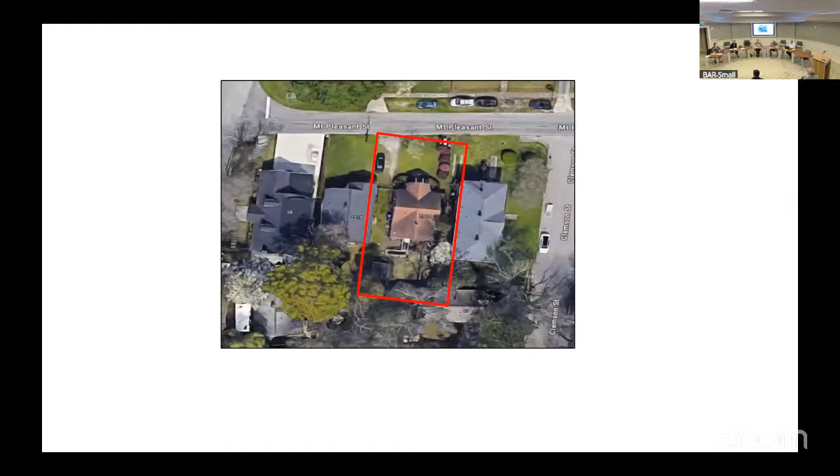Our first project is item B9, 2315 Mount Pleasant Street, and Frankie will give us an introduction to the project. It's located in Wagener Terrace, which is Council District 6. It is a category 4, circa 1940, in the historic materials demolition purview. They're requesting approval for partial demolition of exterior elements which are visible from the public right of way. This is the property's location on Mount Pleasant Street, and I'm going to turn it over to the applicant.

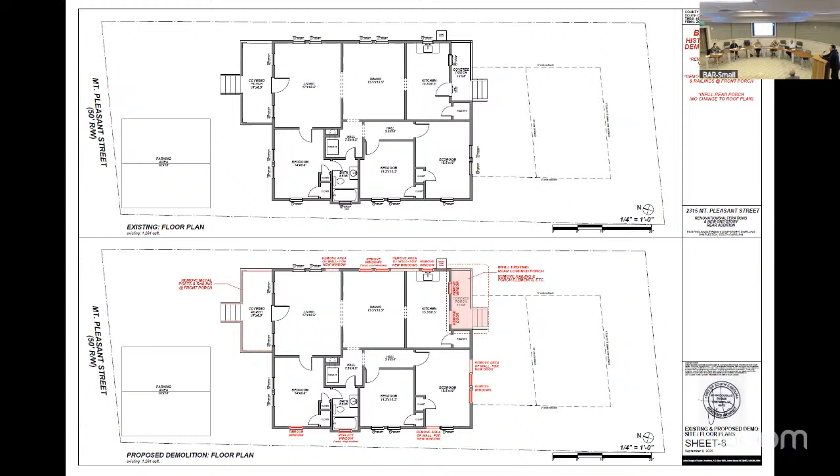Keep going here. If you look at the bottom picture, the plan for the back here is to infill the existing back porch, and then from there we will be doing an addition off the side. Here are the elevations of how it would look, existing, and then new elevations here.

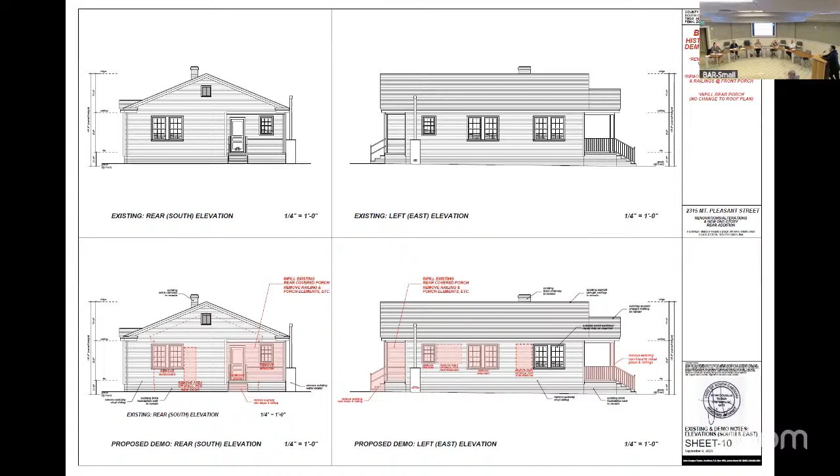That's showing the demo elevations because the board can't look at the proposed; I spoke to your architect already. So the red is showing the areas that you're demoing because that's all the board has purview of. Got it, it's all good. And that is it. Does anyone have any questions? No, sir.

Do any board members have questions for the applicant? No.

Do we have anybody speaking from the public?

Leonard, Preservation Society of Charleston. The PSC appreciated the applicant's time on site this morning. While we are not opposed to the removal of non-original vinyl windows, the existing historic wood windows should be repaired in kind. We encourage minimizing the proposed demolition and fenestration changes to the greatest extent possible. Additionally, iron columns are a character-defining feature of the Wagener Terrace neighborhood area character appraisal and are specifically called out there, so we encourage the board to evaluate these features. Thank you.

Any other comments? Frankie, please give us staff comments and recommendations.

So staff had some observations. The request is a removal of front porch columns and railing, rear steps, some side fenestration, adding additional openings in the side wall to match the proportion of existing window openings, and a portion of rear wall. Windows are character-defining features and should be retained. Staff is not opposed to the openings in the wall as they are matching existing window proportions, and the rear of the structure is minimally visible, only from Clemson Street.

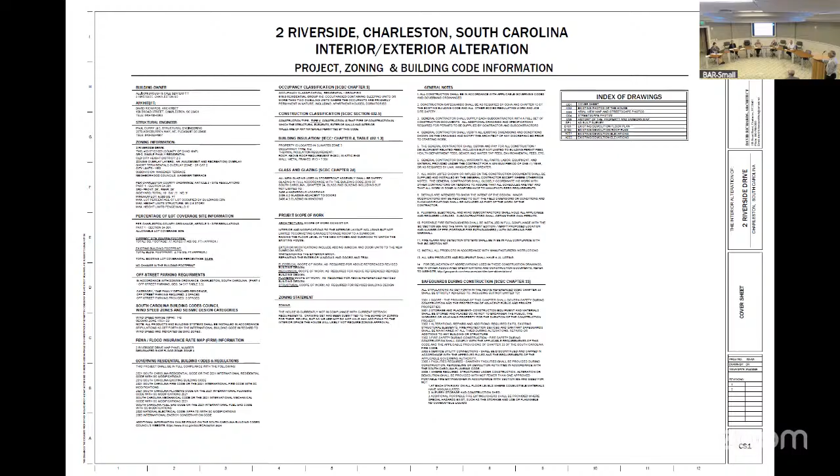This should be pretty straightforward. This is the property, this is the front elevation. There's no work being done on this elevation, which faces Sans Souci Street. This is Riverside, and there's some slight modifications on the back, but I don't think they're visible from the public right of way—minimally visible at most.

So we're really talking about 3 or 4 different things here. First, reworking this porch, making it a little more expansive so they can have a bench out here—right now it's just a stair. To my eye, and some of the board members agreed this morning, this is a non-original addition to the property. You can tell by the way the eaves don't align, and the original eave runs right behind there.

We're also changing it to, intend to change it to a hip roof rather than this gable. But I know we're not supposed to talk too much about the proposal for the new concept.

Removal of this front door—we couldn't assess whether that was original to the structure or added later. We know there were some changes done in 2018, which likely included this porch addition, but we just don't know about this front door. This is a non-original aluminum door. The intention is to remove that and brick in this space.

The concept right now is that the kitchen's in the back of the space. It's very difficult, it doesn't work. There's a laundry closet, so we're trying to bring the kitchen into this space and create a little sunroom here that opens into a very nice backyard. But right now, for them to get to their backyard, they have to come out the front door and around, or out the back of the property. So it's really an inconvenience and doesn't allow the owner to fully utilize the property.

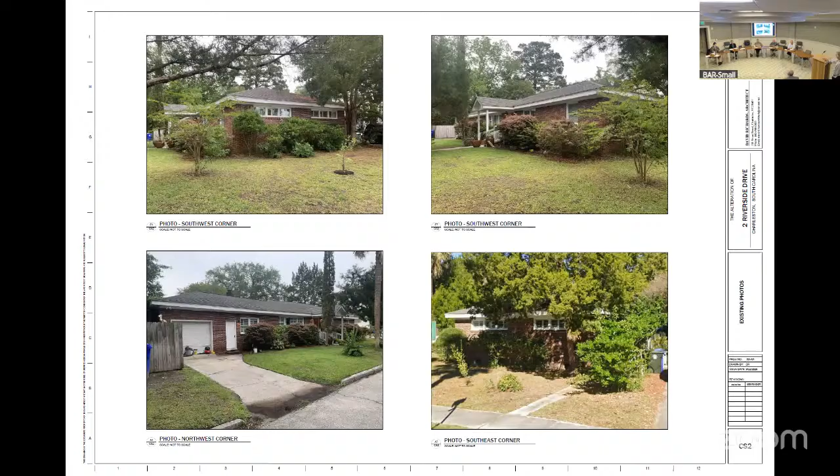Thank you. Do any board members have questions for the applicant? No. Is anybody speaking from the public? Frankie, would you give us staff comments and recommendations?

Staff had some observations that this is requesting removal of an entry porch, garage door, and portions of the roof. The front entry portico is not original to the structure, as we talked about this morning. The garage appears to staff to be a later addition, but its age is currently unknown. Staff is not opposed to alterations at the garage addition, as we believe this to be a later portion of the structure, though we're unsure how the proposed demolition will interact with the eaves and soffit. Staff recommendation is approval for demolition of the garage addition portion of the structure and the front portico.

Thank you, Frankie. Would the applicant like to address anything? Yeah, just to quickly address the comments about the eave and soffit—the eaves and the new construction for the new porch will tie in properly with the soffit, so it'll look as if it's original, but cohesive with the original design. That's the only modification, other than in the back, which again will maintain the proper eave and soffit detailing. We just weren't sure based on how it was indicated on the drawing, so we wanted to clarify. We can close that in the details. Yes, I'll agree with that.

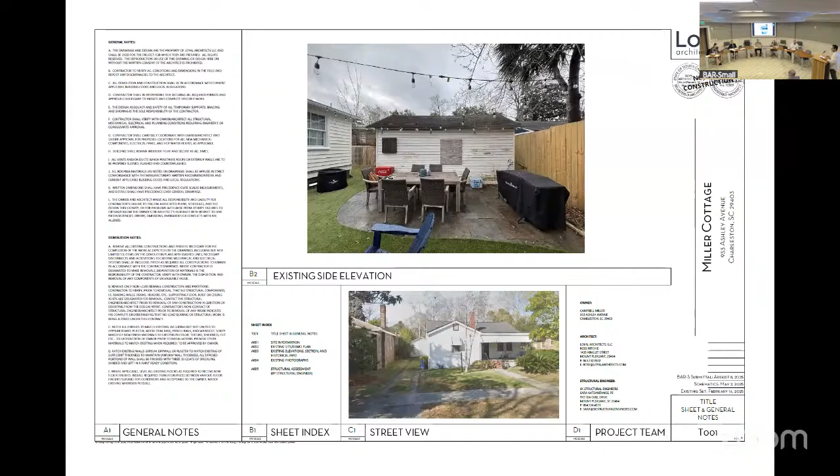Hello, I'm Ross Ritchie with Loyal Architects. Thank you for your time this morning at that wet, rainy site visit. We are requesting demolition of this shed structure, originally a garage structure that had been modified into a shed structure, with framing added over time. As you all saw, there's a lot of deterioration on the exterior and inside, including a large hole in the roof.

There's constant deterioration, and it's located below flood. As seen, it has a lot of deterioration on that bottom level of the structure and the siding. To do anything with it would take lifting it, and there's really nothing to lift at that point. The structural engineer stated it's not safe nor salvageable. We think there are some pieces we could probably glean from the demolition, but it's in rough shape. There's a floor in there, concrete and some gravel, and a CMU block curb, and framing had been added to that, and that's all heavily deteriorated.

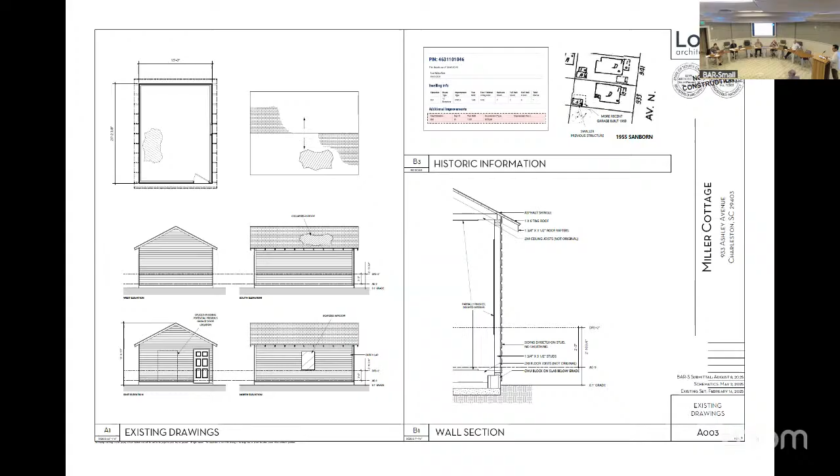But that's where we are. There are photos of it, but they're not here this morning, and there's the structural letter. I think that is it. It's a lot of just 2x4 framing and a lot of rotten framing. If there's any questions, thank you.

Thank you. Do any board members have questions for the applicant? Is there anybody speaking for the public? So Frankie, if you give us the staff recommendations.

The staff just had the observation again: the garage is not original to the structure. The garages do speak to the vehicular history of the peninsula. Staff appreciates the thorough submittal from the applicant, and staff recommendation is that staff is not opposed to the demolition. Thank you, Frankie. Would the applicant like to respond to the comments?

Thank you. The applicant presentation and public comment period is now closed. We will go into board discussion and a vote.

In looking at the condition of it this morning, with the amount of framing damage inside and the roof framing being just 2x4s, it doesn't read as a significant building. So I question if it warrants preservation. So I'm fine with it.

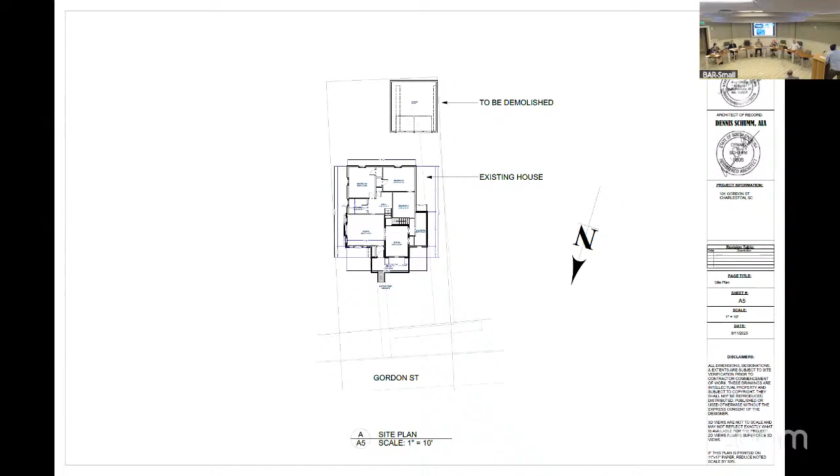Does the board have any questions for the applicant? No. Is anyone speaking from the public?

Planning Community Preservation Society of Charleston. After the fact requests are always unfortunate, and we take requests for demolition of accessory buildings in Wagener Terrace very seriously, given their significance to the developmental history and streetscape patterns of the neighborhood. This building footprint appeared on the 1951 Sanborn map, and while the photos provided indicate there may have been alterations over time, we don't have the ability to definitively evaluate that at this time. We encourage the board to consider this request as though the building was still present, using available tools to evaluate its significance to the history of this property. Thank you.

Kate Catilli, Historic Charleston Foundation. HCF does not support after the fact approval for demolition. Had we been given the opportunity to review the proposal prior to demolition, we could have offered additional feedback or concerns.

Thank you. Frankie, could you give us the board comments? Yes, ma'am. Staff just has observations, more dates. The permit for a new accessory structure was approved 5/20 this year, as new construction is not under BAR purview. The scope of the permit was to build a pool house accessory structure on the existing slab, and the site plan showed an existing slab. As the applicant stated, they did not receive approval for demolition of a rear accessory structure, and the previous structure did follow the development pattern of the street. Staff is never supportive of demolition after the fact, so staff recommendation would be denial of after the fact.

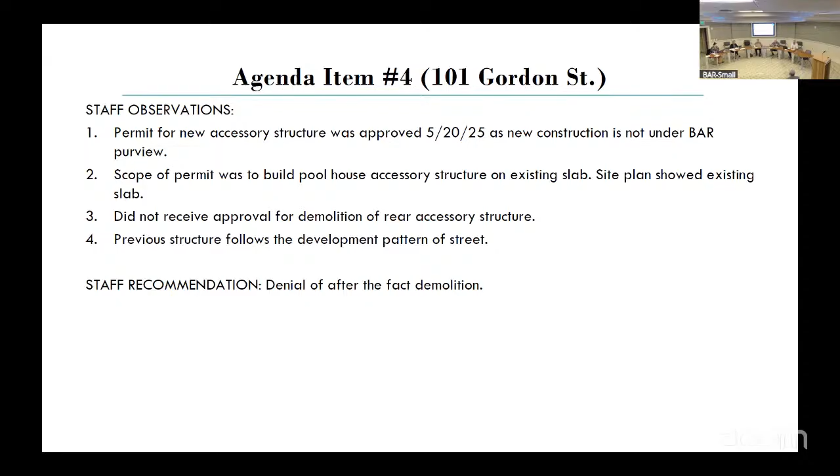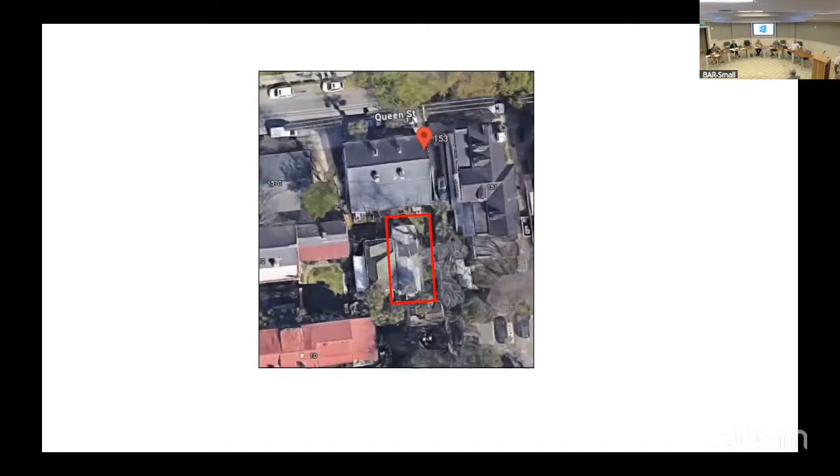I'm Dax Nelson, let me give you an introduction real quick. 153.5 Queen Street is in Harleston Village, Council District 8. It is a category 3 main house, circa 1860, in the Old and Historic District, requesting approval for the complete demolition of buildings. This is the property's location. Now I'll turn it over to the applicant.

Part of the demolition reasoning is we had the structural engineer go in, and he looked at the structure in the back. It was out of plumb and had major deterioration of the foundation. Termites are eating up most of the base of the foundation. Some of the structure is overlapping onto other people's property, and the air conditioning unit overlaps over top of another property. As the structural engineer stated, it's unrepairable.

We also had the city inspector come out, take a look at it, and we gave him pictures. He also gave a second opinion confirming this. We want to build it back in kind, with the same materials and same look as the front building we're currently restoring—that's basically what we want to do.

Thank you. Do any board members have a question for the applicant? Do we have anyone from the public speaking?

Kate Utley, Historic Charleston Foundation. HCF appreciated the opportunity to visit the site this morning. As indicated by the Sanborn map, this building appears to have been on the 1888 Sanborn map. While we acknowledge the structural concerns, we encourage efforts to restore and repair the building rather than demolish it. We respectfully request that this demolition request be denied.

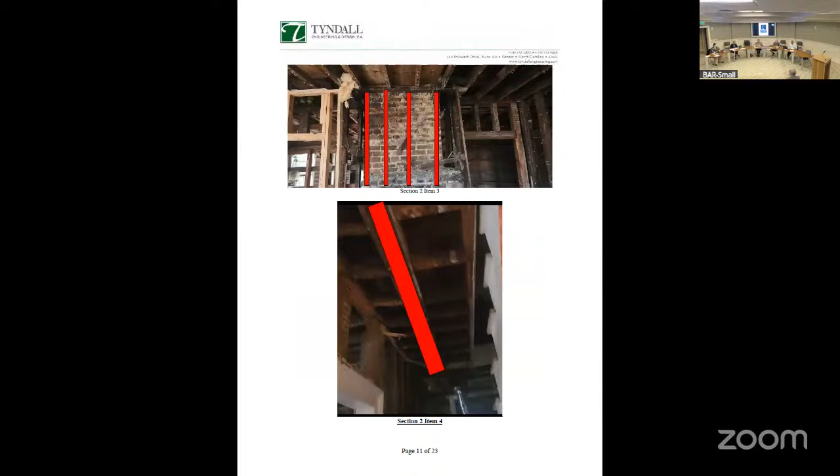Anyone else speaking? Frankie, could you please give us staff recommendations? Staff observations: many character defining features remain on the structure, and it is visible from Queen Street. Our staff recommendation would be denial of demolition.

Thank you, Frankie. Would the applicant like to address any of the comments made?

We will now go into board discussion. I think we all walked through it this morning, and we have seen far worse buildings than this completely restored, and this thing is 100% restorable. So I'm not in favor of this demolition.

Nothing to add. Someone like to make a motion? I make a motion for denial of demolition. Do I have a second? I'll second. We have a motion by Bill with a second by Fillmore. We'll put the motion to a vote. Darryl, you in favor? Bill, yeah, in favor. Fillmore, yeah, in favor. And the chair votes with the majority, and the motion passes 4-0.

Our next item is B6, 69 Washington Street. I was just putting my note that Darryl is recused for this item.

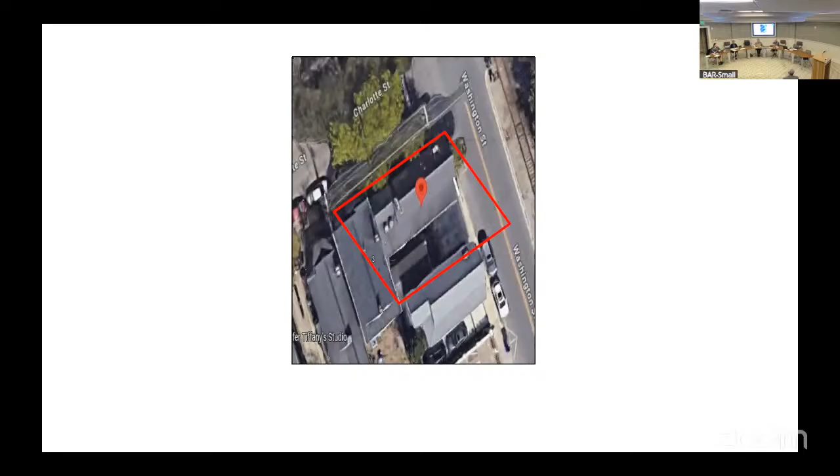69 Washington Street is in Council District 8. It is a category 4 house, circa 1872, in the Old and Historic District. Requesting approval for the complete demolition of the ADU, deck, and stairs. This is the property's location on Washington Street. I will turn it over to the applicant.

Good evening, everyone. I am Ashley Strobel on behalf of Cobb Architects, and this evening we are requesting approval for the complete demolition of a non-historic accessory dwelling unit and the raised wooden deck that connects the ADU to the main residence at 69 Washington.

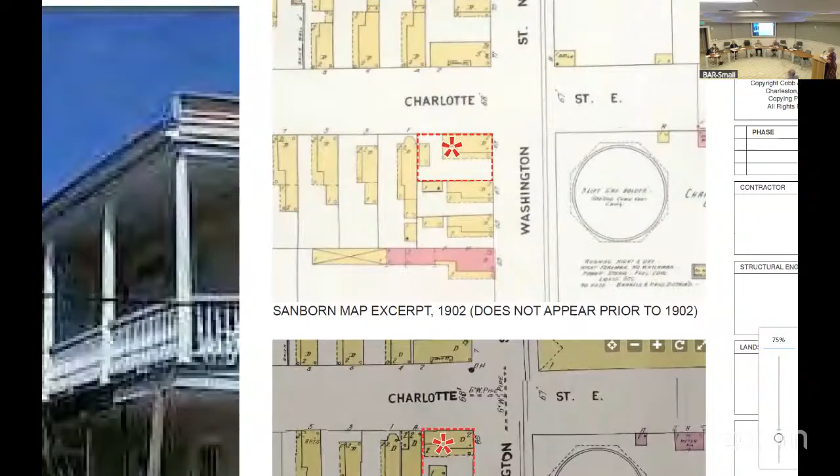Historic documentation indicates that a rear dependency once existed on the property but was removed prior to 1944. On the Sanborn map you really can't see it unless you zoom in. Can you zoom in on this? So you can see that the rear dependency is behind 69 Washington.

At some point between 1902 and 1944, they subdivided that lot to create an address on Charlotte Street, and it now resides to the south of the main structure.

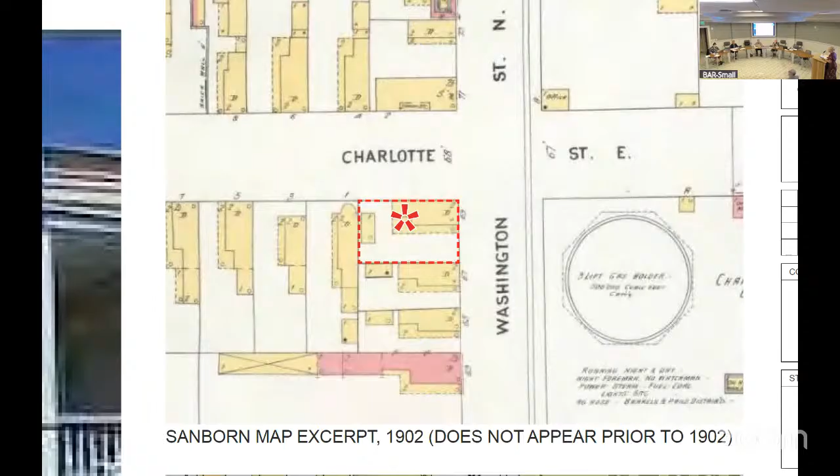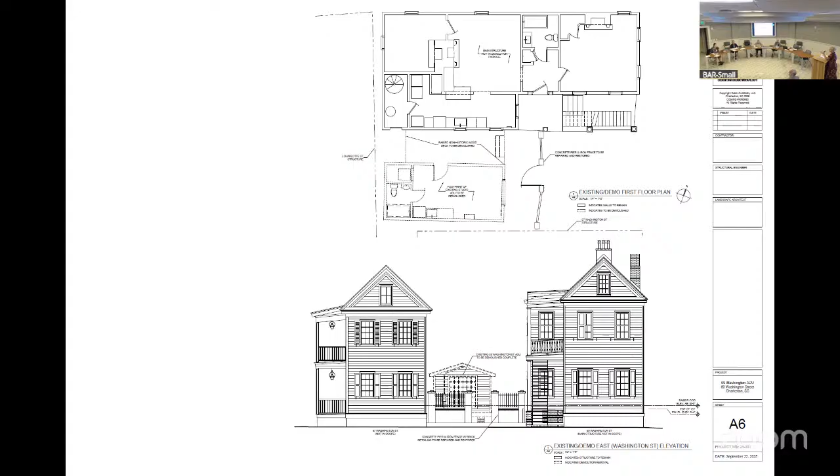So you can see that new structure cantilevering, and the accompanying slides provide visual context on the current site plan. You can see where that one-story ADU is situated in the bottom left corner of the lot, very tight to the adjacent structures. And we also have architectural detailing of the main facade, floor plan, and this is the building that we are proposing to demolish.

I will hand it over to you. Thank you.

Thank you. Do I have anyone speaking from the public? You can ask questions in any order.

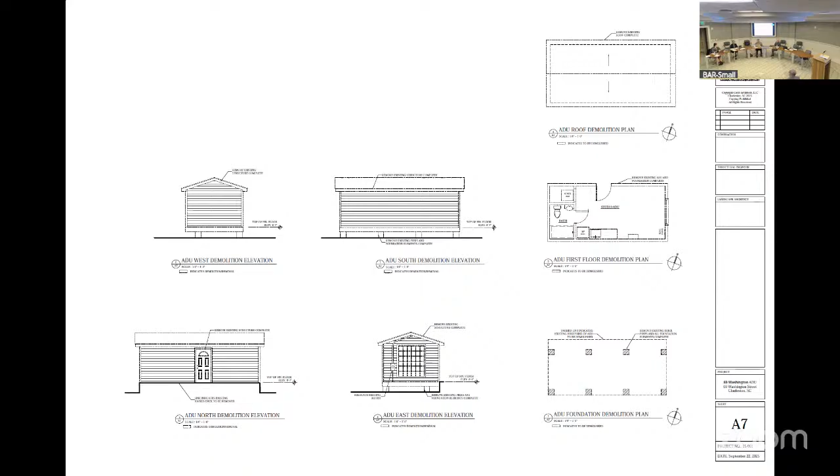Frankie, could you give us staff recommendations? Staff just had some observations. Due to the photos, we believe that the current accessory structure was reconstructed in 1997 due to those conditions in the photos. Due to that, staff does not oppose the demolition.

Would the applicant like to respond to the comments? Okay, thank you. The board will now go into discussion and a vote.

Would someone like to make a motion? A motion for approval of demolition. Do I have a second? I'll second. We can put the motion to a vote. Fillmore, yeah. Bill, yeah. In favor, and the chair votes with the majority, and the motion passes 3-0.

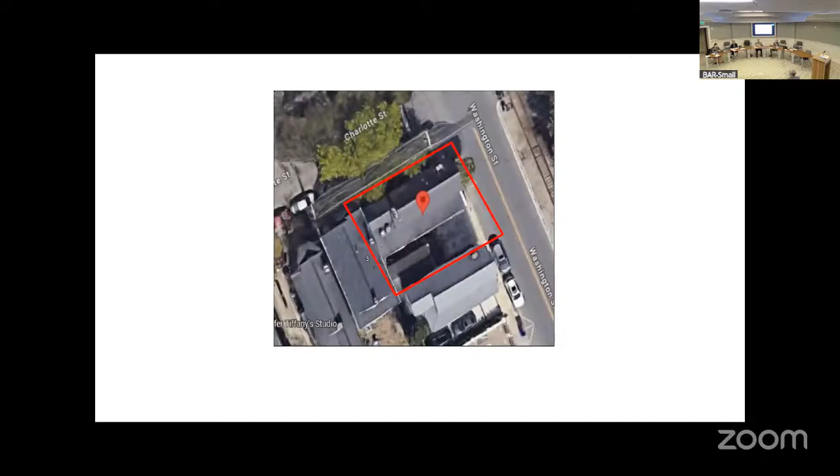I'm sorry, we've already seen the location, so I'll turn it back over to the applicant. Thank you. I can't type and talk at the same time. I get it. Okay.

So the intent of this submittal is to seek conceptual approval for the renovation and vertical elevation of the main residence and the reconstruction of a non-historic accessory dwelling unit at 69 Washington. Sorry, it gets a little funky. That's okay, thank you. This slide looks very similar to the previous presentation.

But again, we've seen that site plan, so this work here aims to preserve and enhance the property's architectural integrity while meeting current flood requirements and improving overall site organization. We have previously received the necessary approvals for structural modifications and variances from the Board of Zoning Appeals. This includes a special exception for the main house to be granted to vertically expand the main structure by 1 foot above design flood. We had a variance received for the front setback, which is by code a standard of 70 feet from the front of the property. However, because our lot was subdivided in the past, we obviously don't have that depth.

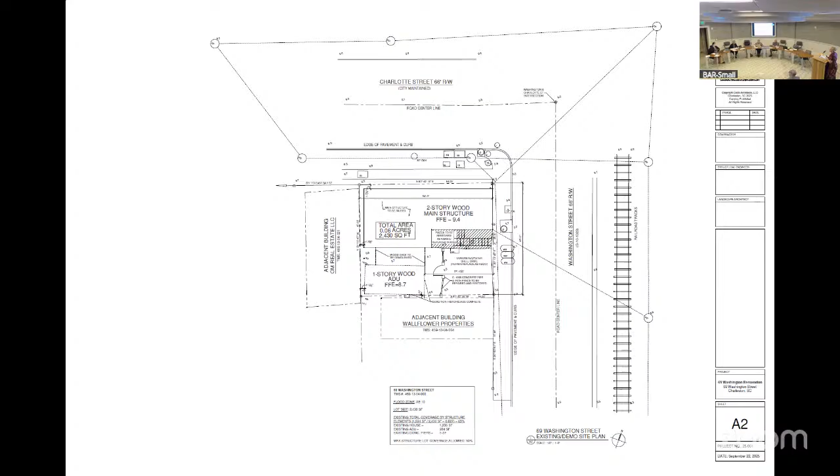Similarly to the historic context from the previous presentation, the main structure dates back between 1872 and 1885, and it is identified as a Charleston single house with a historic rear dependency, shown in the 1902 Sanborn. However, the rear portion of the lot was subdivided, and the dependency was either removed or relocated. Over time, the piazza experienced various alterations, which include partial enclosure at the rear of the building and the addition of exterior stairs when the house was converted for multifamily use.

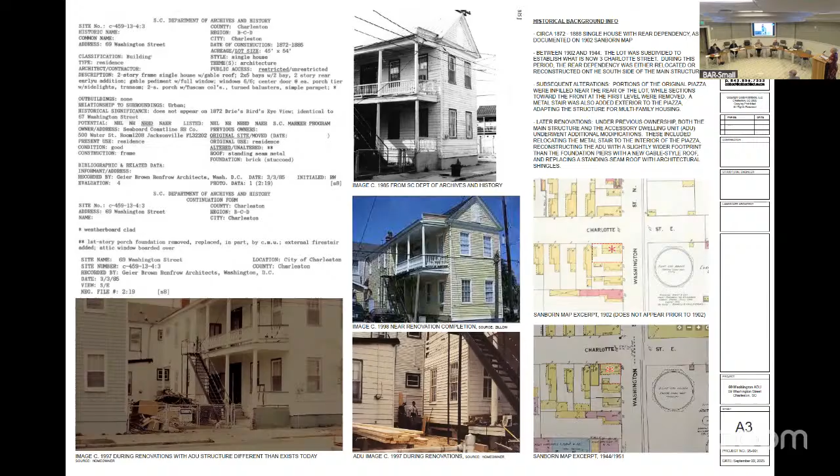So you'll see at the bottom photos, there is an exterior fire stair that is located outside of the piazza. During a 1997-98 renovation, that fire stair was actually restructured into the piazza. Later renovations in the late 20th century, late 90s, included rebuilding the ADU on top of historic brick piers, and they also made non-historic alterations to the main house.

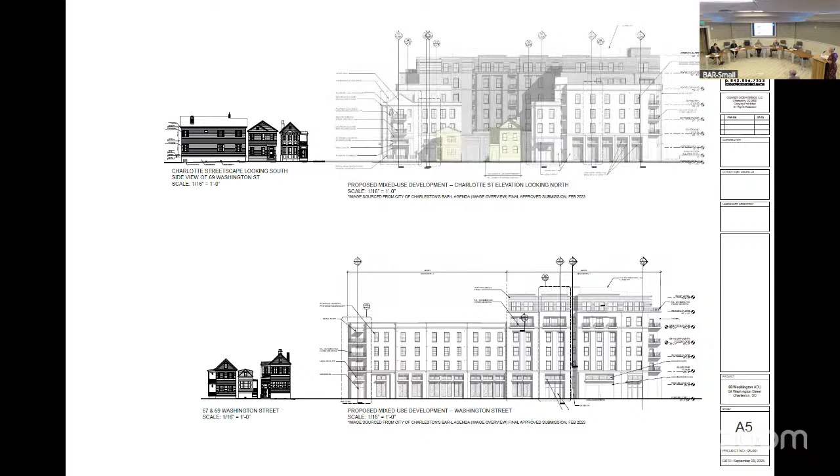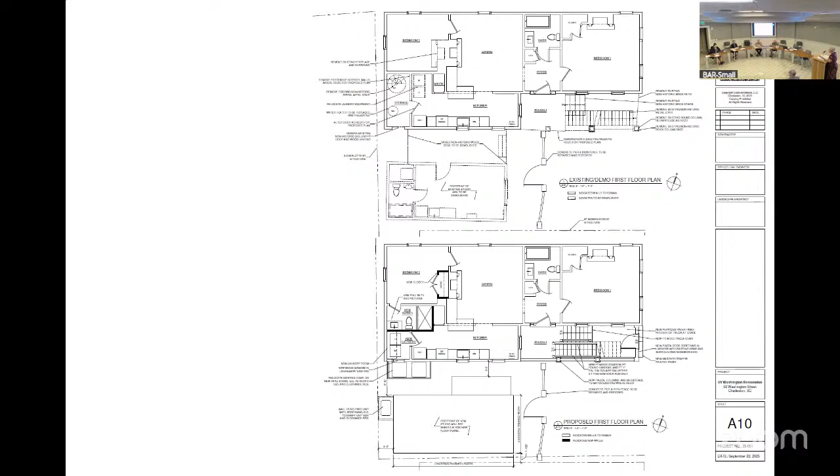For the main structure, we're planning on raising the house to meet flood elevation at 2 feet above base flood and reconstructing the foundation out of continuous concrete block with stucco finish. We will restore and repair the historic piazza, removing the non-original metal exterior stair and reintroducing a simpler wood stair interior of the piazza. We will add new piazza screening at the street level for privacy and improved facade composition.

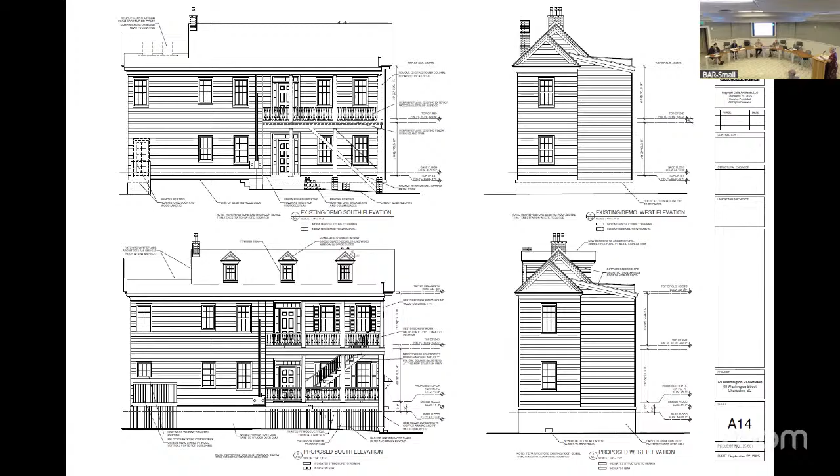Moving to the accessory dwelling unit: as we plan to demolish the non-historic ADU, we want to rebuild it with the existing footprint, but pull it off the west and south property lines. We would like to include a modest entry porch and raised floor aligned with the main house's finished floor elevation at 2 feet above base flood, which is 1 foot above design flood.

The accessory structure maintains a scale and mass appropriate to its secondary role on the site while enhancing the overall architectural cohesion between the two buildings. Thank you. That concludes the presentation.

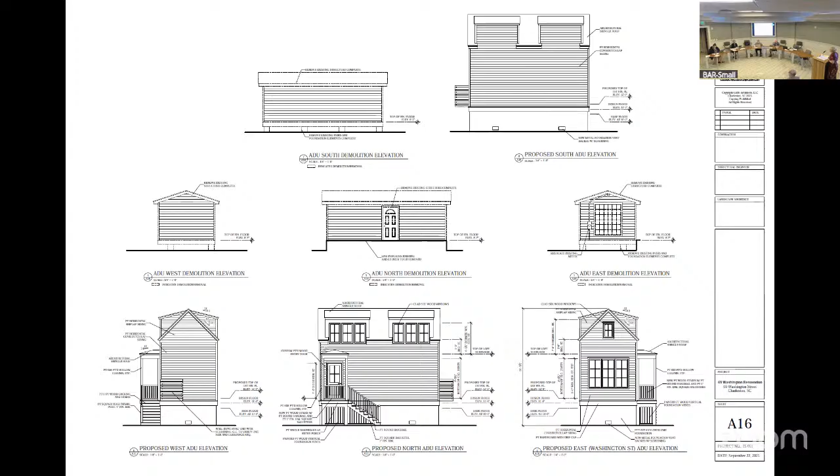Thank you. Does the board have any questions for the applicant? In terms of the piazza screen, do you have any documentary evidence as to

what an original piazza screen might have been, if there was one? We don't know if there ever was an original piazza screen. However, all the homes along Charlotte Street do have them, so we were inclined to bring that character over to 69 Washington, and it would actually screen that internal piazza stair, which we believe will look very nice from the street view.

Does the house next door have one, or does it? 67 Washington does not. And you also never exited the piazza to the front street side, you always exited to the side. Thank you.

Do we have anybody speaking from the public?

On behalf of the Preservation Society of Charleston, the PSC appreciates the applicant reaching out to us to discuss this project. We are excited to see this substantial rehabilitation and elevation project move forward, and encourage the applicant to repair in kind and retain as much historic material as possible. As this project progresses, we encourage continued study of the proposed dormers to minimize impact to the historic roof form. Given that the floor plans do not indicate this will be habitable space, we don't find compelling reason for such a significant alteration to the historic roof form. We encourage eliminating the dormers, or at the very least, limiting them to the south or piazza side only. Thank you.

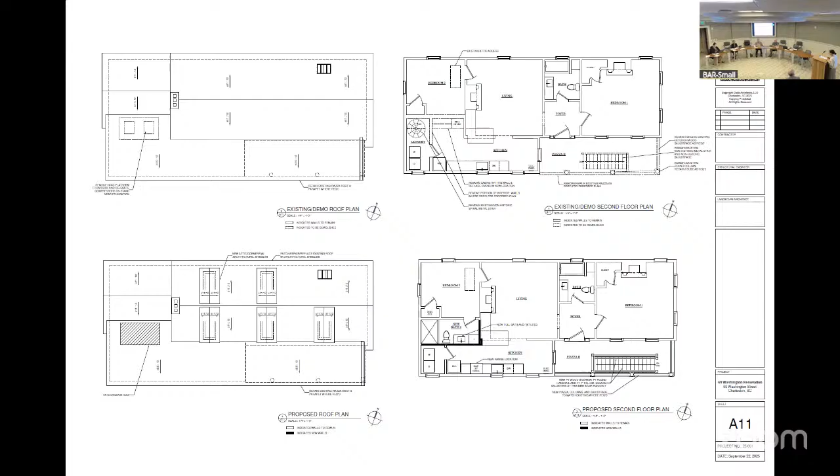Is there anyone else? Frankie, will you give recommendations? Yes, ma'am. Staff had some observations.

The proposed accessory is subordinate in height, scale and mass. Due to the proximity to the neighboring single house, we think it needs to be reduced in height, at least visually. It is atypical to have dormers on the north side of the existing historic structure. And I didn't notice this before, so just a note, confirm the deck being located at grade with the floodplain.

Because I feel like I've had some lately where they've required them to be elevated. They're gonna be elevated. Okay, I thought they were actually on grade. She said that, but they're on a stand. Then I will get rid of that note. I just made a note to say it because of that.

Staff condition for approval on the accessory: push dormers toward rear of structure or remove the front set to reduce presence at streetscape, and remove dormers on the north side of the existing historic structure. Staff recommendation is conceptual approval with board and staff conditions, with preliminary final review to be done by staff in the permit. Would the applicant like to address any of the comments made?

Daryl Cobb Architects. In respect to the ADU, if we remove the front dormers, I think the building would look a bit lopsided. Can you pull that elevation up? You said the ADU, yeah, that's the ADU. Right now, in our opinion, that's a symmetrical elevation, so if I got rid of that front dormer, I think that would not work.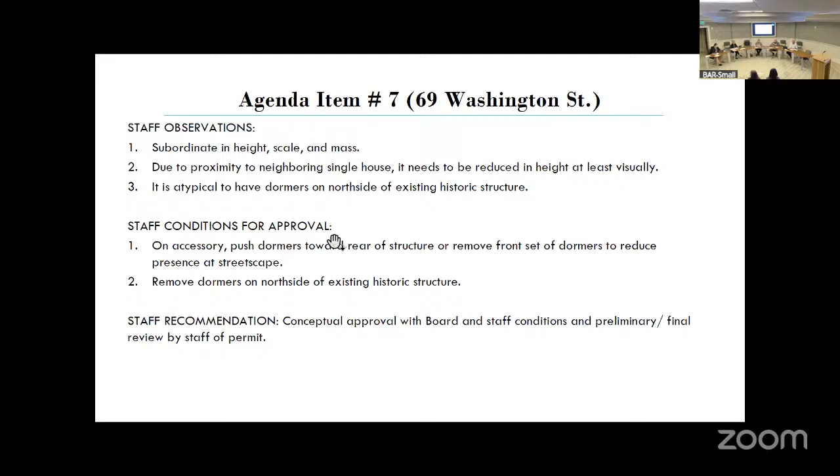This is the property's location on Bull Street, and I will turn it over to the applicant.

Good evening, I am Julia Martin with JFM Architects, here representing our clients, Kevin and Haley Mills, who own a property at 56 Bull. We are requesting review of a detached accessory structure as permitted by the zoning ordinance. We've taken a long and winding path to get to this point, and I will elaborate on that a bit as we go.

Okay, cool. So the dwelling at 56 Bull is commonly referred to as the Denmark Vesey house, which has meaningful symbolic significance despite some historical disconnects, and despite having actually been constructed in the 1830s, which is after Denmark Vesey's death. But be that as it may, it's a fine and well-preserved freedman's cottage, and we would never question the need to treat it with respect.

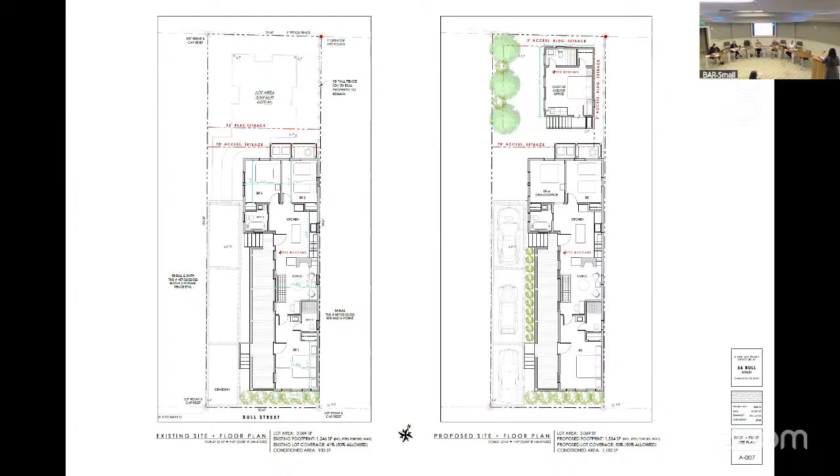The historic cottage has a first floor elevation at 10.2, which is almost 2 feet below where it should be based on current FEMA requirements. It follows that that's almost 3 feet below the required elevation for new construction, which our accessory building is. So we've pulled out all the design tricks we have in our arsenal to try and mitigate that height.

The proposed ceiling is set at 8 feet. We've added a water table under the siding to draw the eye down and downplay the height of the foundation wall. We're proposing a decorative treatment at the foundation vents on balusters and frames rather than typical 8x16 flood vents.

Although we'd originally studied this as a very low slope roof with a truncated parapet, we're now strategically proposing a shallow hipped roof instead, because it allows us to pull the eave line down slightly and lessen the visual impact, even though the ridge reads a little taller in 2 dimensions. Hipped roofs, as I'm sure you all know, are deceptive in this way.

We think this approach is better all around, including for the light and air getting through to the neighboring properties.

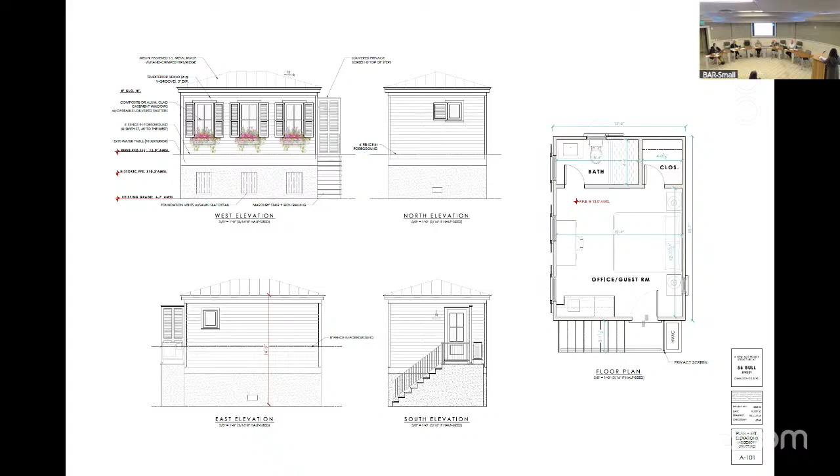That said, we've given this compliant paradigm a lot of thought, and I believe this solution is about as diminutive and respectful as it can possibly be. And it's certainly reversible if future generations should wish to erase it.

But it's safe to say that the impact of this structure to the streetscape is minimal. There is a partial view corridor from Smith Street as well, which was shown in the applicant set.

But we've tried mightily to lessen the impact all around. The last thing I'll mention is we will probably suggest painting the structure in a deep neutral color with a monochromatic approach. That's pretty common in many historic contexts, and we would do that just to further downplay its presence and help it recede as much as possible into its surroundings.

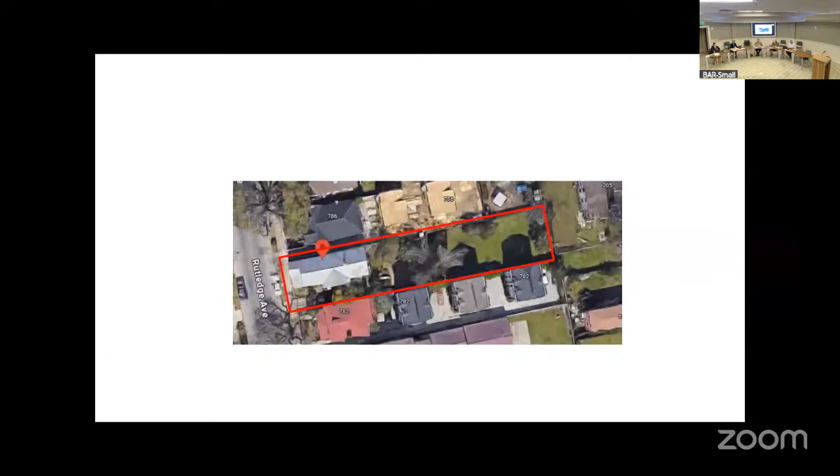Item B9, 158 Spring Street has been deferred, so we will move to item B10, which is 784 Rutledge Avenue. This is in North Central, Council District 4. It is not surveyed, circa 1925 in the historic code. They are requesting conceptual approval for two accessory dwelling units at the rear. This is the property's location on Rutledge. And I will turn it over to you.

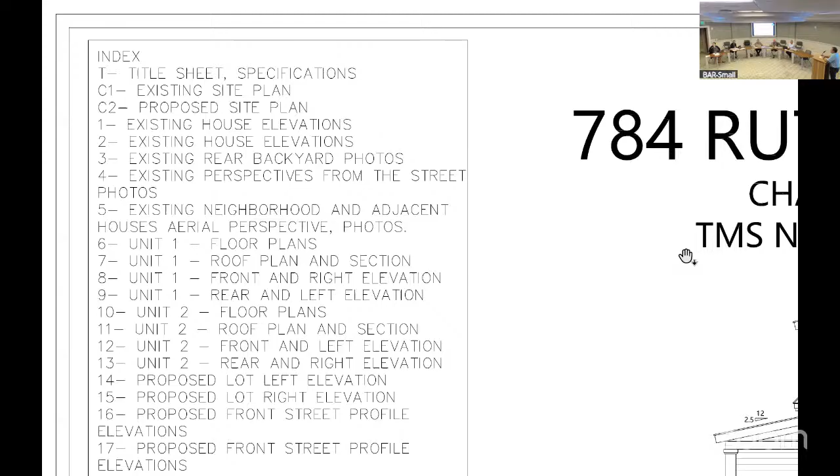I'll really just focus on the comments we received from our last presentation and how we've addressed those. The last comments had to do with the overall height of the proposed structures in the back, which were still 1.5 inches higher than the front house. So we adjusted the pitch and knee wall to bring that down, and now I believe we're at 5 or 6 inches below.

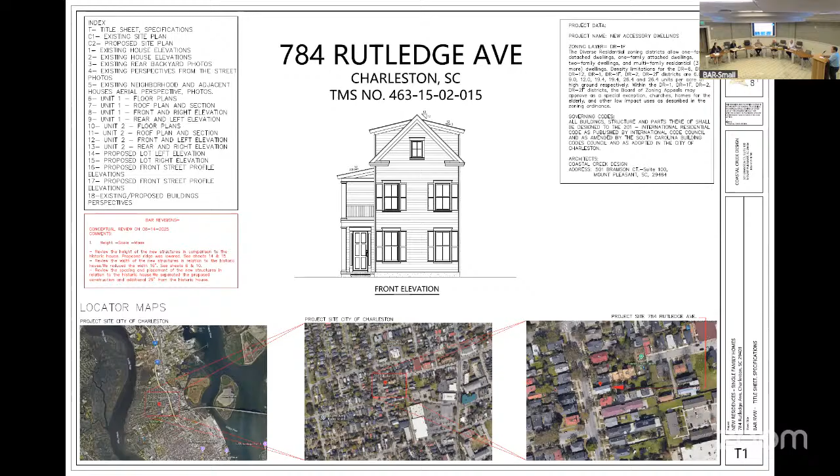Everyone was also concerned about the distance of separation between the back of the existing structure and the front of our first proposed structure. We reduced the overall depth of each unit, not by much, and pushed them closer together to create more separation between those units. We'll get to that on the proposed site plan. You can see the previous plan, we were at 12 feet 7.5.

We have now adjusted to get the 15 feet of separation, still trying to keep an area that can have some AC units, one accessible from this side, the other potentially from the alley side. The rear of the back unit has not changed, due to civil engineering and needing to work with the stormwater calculations. That's pretty much the hard stop we've been given from the beginning of the project. We've reduced the depth of those units and continue to shove them away, and I'm hopeful that getting to 15 feet will be acceptable and agreeable.

This is our existing elevations of an historic structure up front.

Oh yeah, this is not a sore throat again, don't you? No, it's over a month ago and I'm still trying to recover. Thank you, I still have a cough from mine last week. I'm understanding, and so the more I talk, the worse it gets.

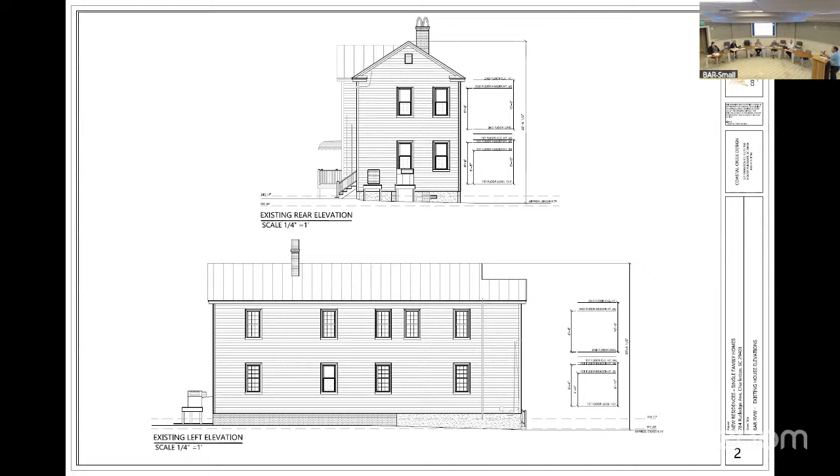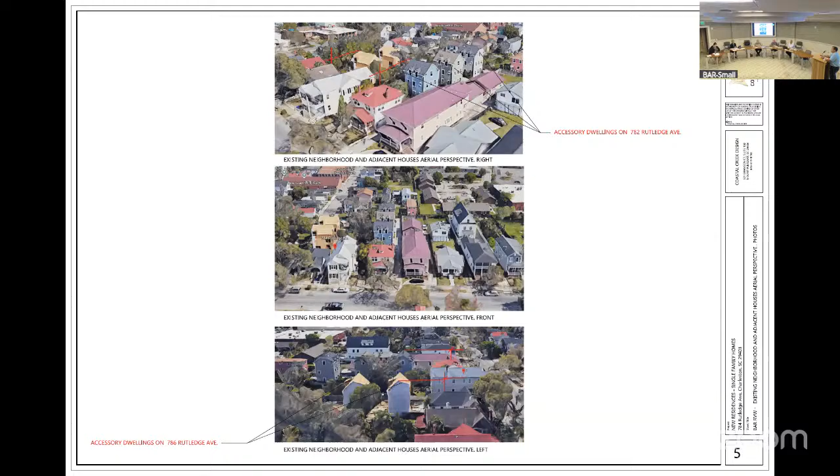But they're just elevations of the existing structure. You can see the length and depth of it, some context photos as well. And this we've seen before, and I understand that what has been done left and right doesn't allow for me to do something that's grossly out of scale in context. But I'm hopeful that when you look at these plans today, you will see that we are subordinate to the historic structure, and that we'll be able to move forward with the design.

These are just, again, what's on top is what was previous, what's below is proposed, and so you can see the difference in the width of that proposed structure, a slight change in the overall depth of it. Just doing everything we can to maintain a program that works for our client, but that also is something that can be agreeable for y'all in getting an approval.

These sections, you can see again the change in the overall height of the proposed structure. We are in a flood zone, which is what is dictating that finished floor level. Unfortunately, if we were in an X zone, we would be able to drop down a little further.

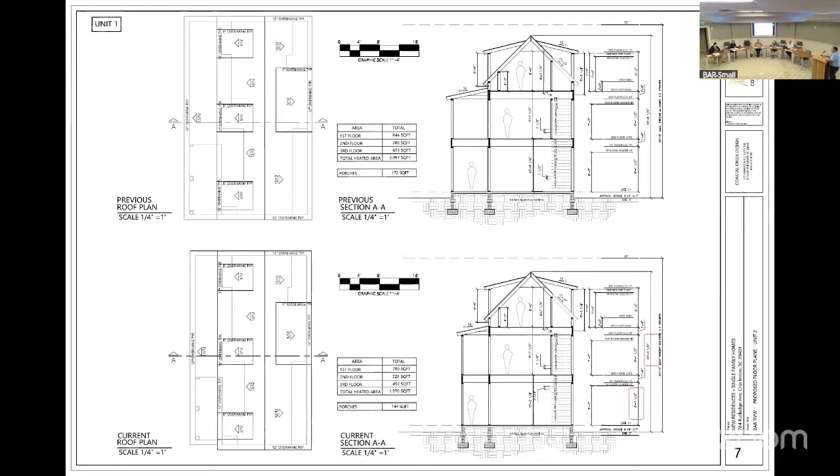Than the proposed, before and after, previous on top, proposed below. Overall, each time we've been told the architectural direction is good. We've got the double piazzas matching the length and depth, and you'll see that the overall height now is at 32 feet 3.5 inches. It was 32.9.5.

And I'll get to, I think, this is the second building in the back, very similar to the front one, a little different in just window and fenestration on it.

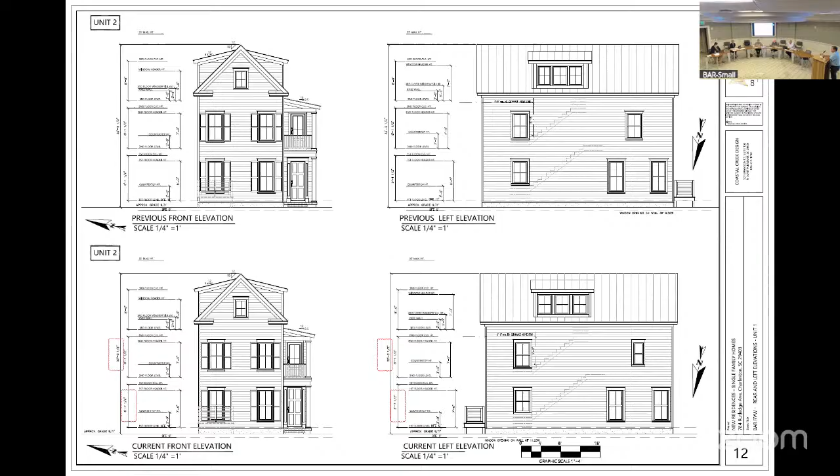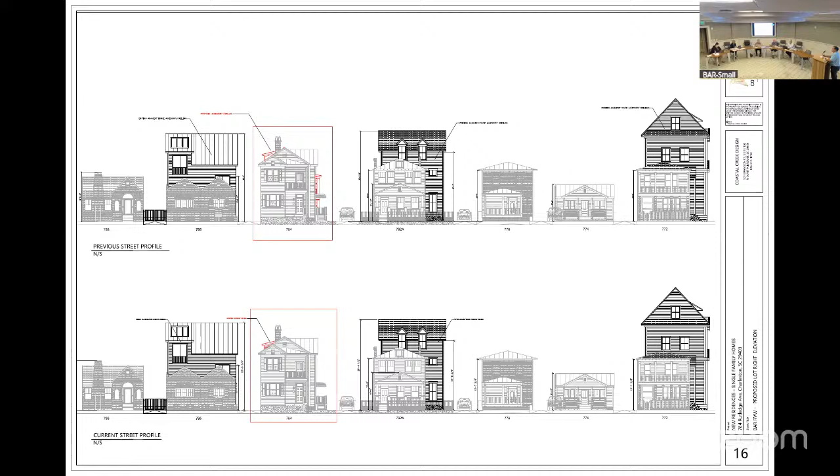And so with that, I'll just take questions.

Thank you. Does the board have any questions for the applicant?

Is anybody speaking from the public?

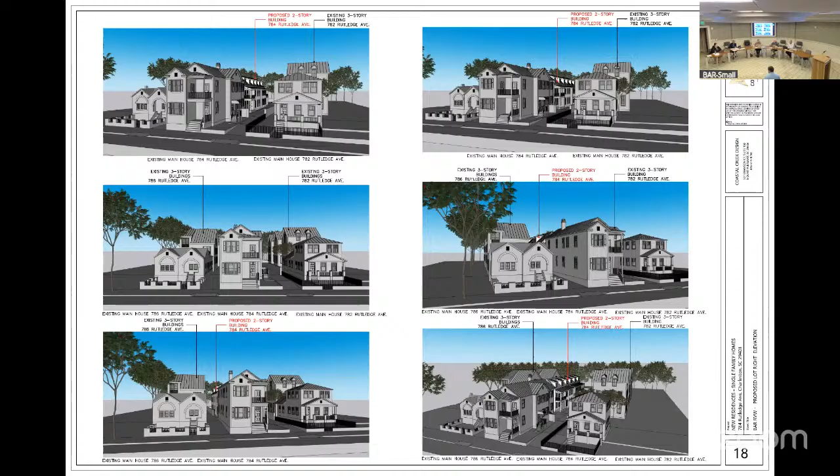Frankie, would you like to give your recommendations? Staff has just one observation. The proposed structures have been reduced in height, scale, and mass, and have been shifted further back on the lot per the previous board motion. Staff recommendation is a conceptual approval with any board conditions and preliminary final review by staff of permit.

Thank you. Would the applicant like to respond to those comments? I like those comments. The applicant presentation and public comment period is now closed. We will move into board discussion and a vote.

The dimensional changes are small, but I think they are helpful. I think one thing that helps these buildings read a little smaller is that their eave line is substantially lower than the front house eave line, even though the ridges are approximately the same. Given the fact that we've got neighboring properties on both sides that have rear houses that are substantially taller than these, I'm willing to grant leeway on subordination.

I think on this, there's about 3/4 of a block on Rutledge that have these extremely deep lots like these that don't exist anywhere up and down Rutledge. Prior to the board having purview up in this area, I think 4 of those lots have been developed with those enormously tall buildings. So I don't think it's right to penalize this property owner who is doing something that is not quite subordinate to the main house, but is substantially shorter than those that were built before the BAR had purview in that area. I think Joel has really addressed the board's concerns, so I'm good with what I see.

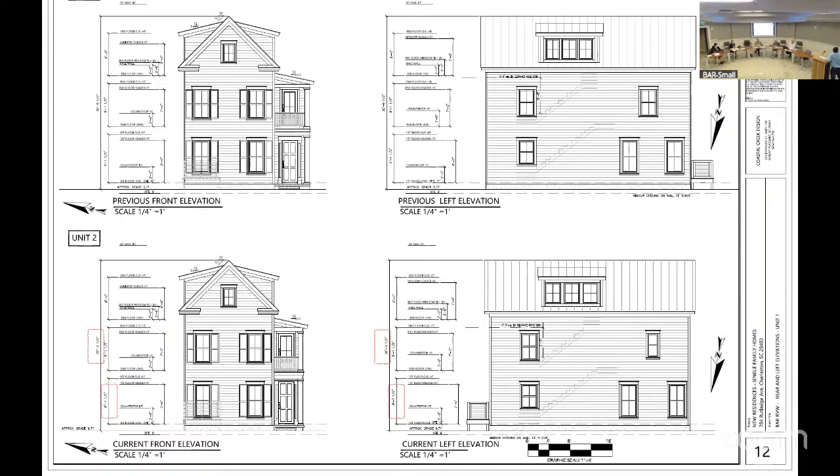I don't think an inch and a half is gonna make any difference. And your third floor knee walls are either 2 feet or 18 inches. But it should say up here, so it's still 2 feet from the knee wall on that third floor. Okay, all right.

But I think what Fillmore is saying is we would have seen a little more reduction in the ridge height, and potentially a little more reduction in the width. Is that right? Maybe you can't get that and still have that much space.

Joel, what's the engineer's reason for why these can't be pushed further back on the lot? I don't know, Bill, because I don't understand all of his calculations, but when the project first came to me, I said we need to shove them in the back, and have the parking lot between the two houses. And he said he didn't know where he's running pipe or what's happening with the fall of the land. There was something, he said he couldn't put those in the back and make the calculations work.

It would have been done the meeting prior if I could have shoved them back. And if they had been back there the first time, that would have been the only thing I had.

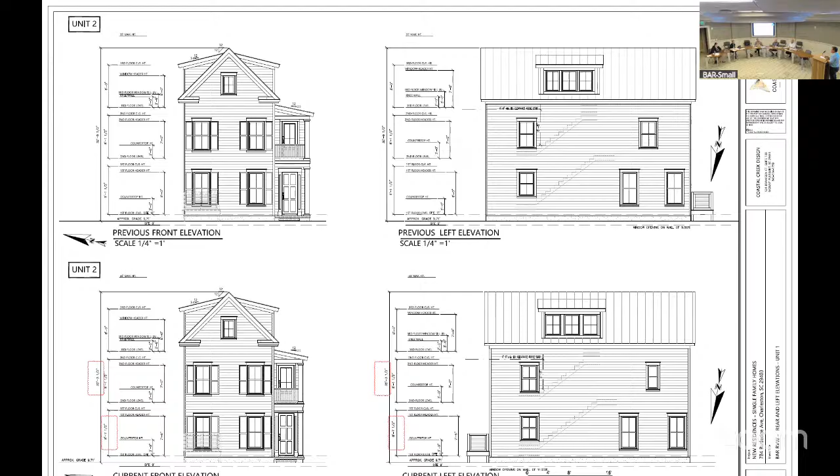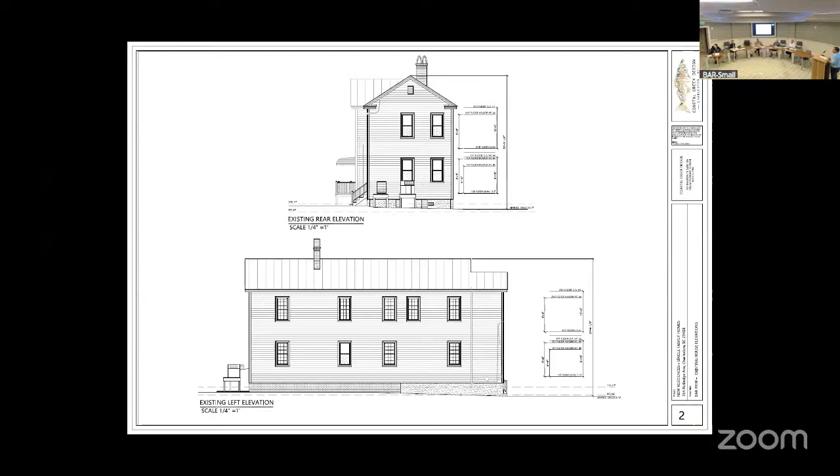So I would love to push them back. I looked at it, and when we go to that site plan, you could open it up. I looked at it and thought, well, if I can yank these two units out, I can probably shove this a little closer.

Fire rated, I don't need windows on those walls. But then I'm having to locate these units somewhere, and I don't know if it'd be okay to just shove those up the wall and have them hanging off the side. They've got to get up to at least the second floor because I have cars and parking that will be underneath them, but I'm willing to look at that if you're okay with the units.

If we go to that rear elevation, maybe for building two, they wouldn't be visible from the right of way. It would make the elevation unattractive just having these units sit up there, because there's gonna be probably three of them.

But I guess we could do a split, the third floor, second could go onto one. But that's not gonna buy you much room. Looking at this, we would put them off center, maybe keep them above, in this zone.

So the reason they're not pushed to the back is because of infrastructure constraints. It was completely civil driven, the location of the second building, and that hasn't changed from each of our presentations to you. The only thing that changed was the first building pushed back and then pushed back again. Then we took some depth out of it, and we're still trying to accommodate rooms close to 11 feet for a bedroom, and anything 10 by 9s or 10 by 10s.

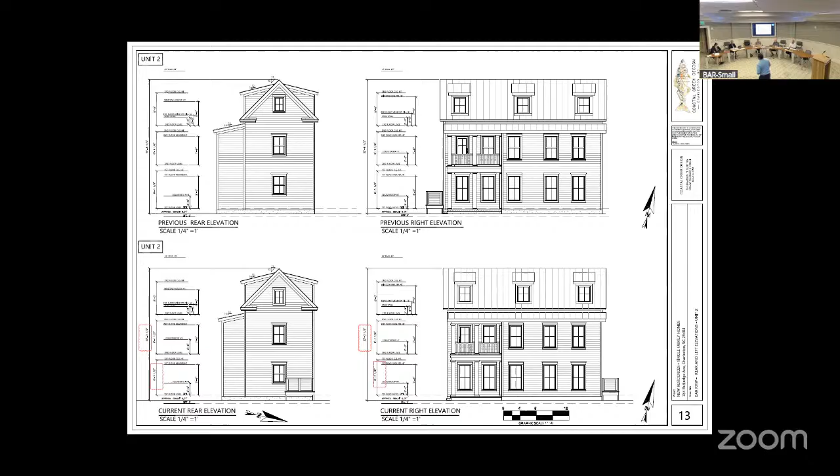The next item is B11, 774 Rutledge Avenue. That address is in North Central Council District 4. It is a category 4, with proposed new construction; the existing building, circa 1925, is in the historic corridor district. Requesting conceptual approval for new single family dwelling use. This is the property's location on Rutledge, and I will turn it over to the applicant.

Thank you, Frankie. I'm Patrick Orfis with Arwen Studio Architecture. Appreciate everybody hearing me tonight, or all of us tonight. We are proposing a new single-story, two-story, single-family dwelling on the rear of an existing property.

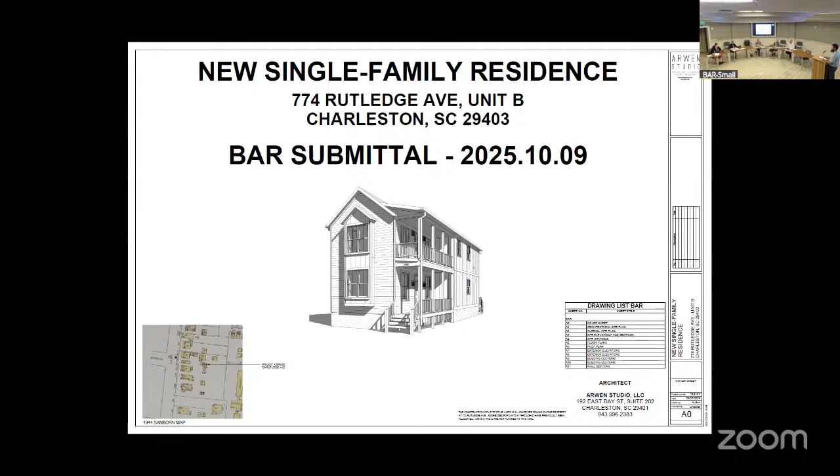Probably some similar discussions to the last project that we just talked about, being just about 3 or 4 doors down. A couple different scenarios going on with this property than the previous one. We've got a couple of site plans here.

About 5 years ago, there was a 2-story building on the backside of this property. It was torn down, I think, 2 or 3 years ago, but it was there for quite a while, 30, 40 years. So the middle site plan is the current status of the lot without the second building back there.

And the lower site plan is what we are proposing. You can see we've tried to push this building as far back as we can go to that rear setback line, trying to really downplay any type of scale or height from the streetscape itself. You've talked a little bit about the precedent set along the streetscape and what might have been done prior to BAR having historic purview up there.

But there are some massive houses to the rear of the historic houses right on the streetscape. One of the unique things about this site is it's one of the only single-story buildings on this streetscape. There is another one about 3 houses down to the right, and the next one is about 5 houses down to the left. There's just not a lot of single-story pieces here.

By zoning, we are allowed 4 units on this site. There's actually 4 addresses associated with 774. We're trying to minimize that, make it 1, push everything to the back. So talking about that subordinate type of thing, we don't have 4 massive houses here — we're having 1 proportionally sized house.

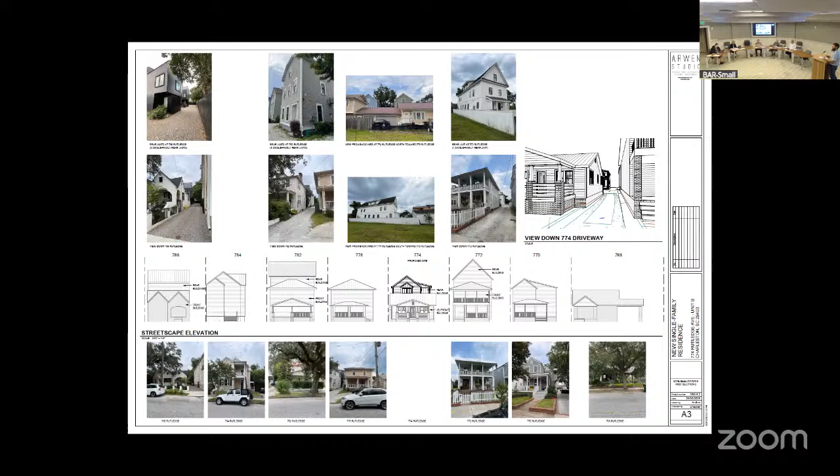A few comparative elevations and site sections here showing the previous 2-story building, what we're proposing, and a view from across the street where you can barely see this 2-story building behind the 1-story building on Rutledge.

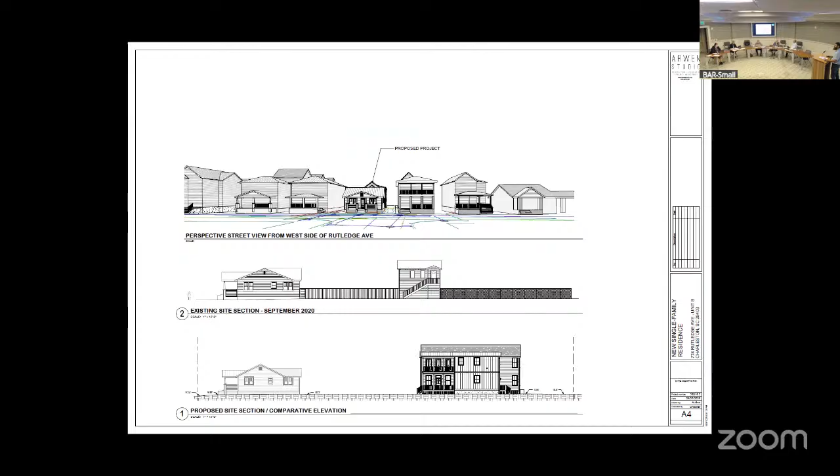So the building itself, we're proposing a 4-bedroom, 3.5 bath, about 2,400 square feet over 2 floors. So it's not a tiny building. It is more narrow than the existing historic building up front, and also more narrow than the original 2-story building that was on the back of the site prior.

A couple of elevations — we're proposing fiber cement siding, a mix of board and batten and 5/8 lap, aluminum clad windows, and stucco coated CMU foundation for the most part. The pitch of the roof is 9 and 12 over the main portion.

That takes you through about everything I think I have. Thank you.

One quick question — it's not in a flood zone? It's not in a flood zone, it's in a shaded X flood zone. So we are 3 feet above grade with a crawl space. I don't like to do crawl spaces much lower than that with the moisture and stuff we have here.

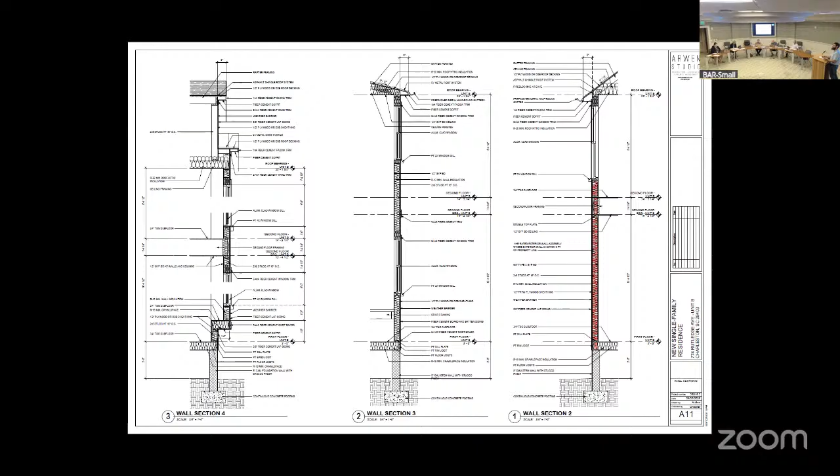Yeah, it's hard to see on the screen out there. Do you want me to zoom in? We're doing that anyway. Here it comes down and it's got sort of a nib on the bottom of it. Yeah, I think I've seen that too. I think it's a drafting error — I've got a piece of trim, but it shouldn't be that big coming through. That might be a drafting error. It's showing the floor instead of the trim underneath the decking. Okay.

Does the board have any additional comments or questions for the applicant? Is there any public comment?

Kate Utley, Historic Charleston Foundation — HCF has reviewed the request for a new single family dwelling at the rear of 774 Rutledge. HCF would request that scale and massing be restudied to be more complementary to the building currently on site, and recommend accordingly.

Preservation Society of Charleston.

While the PSC recognizes that this large, deep lot with a one-story primary structure presents a unique design challenge for future development, the BAR ordinance is clear that the height, scale, and mass of secondary structures shall be subordinate to primary historic structures. We ask that the height and mass of the proposed building be reduced to be as deferential as possible to the historic building. Additionally, we feel the proposed vertical siding on the south elevation may read as piazza infill and should be restudied. Given the level of restudy required, we ask that this proposal be deferred. Thank you.

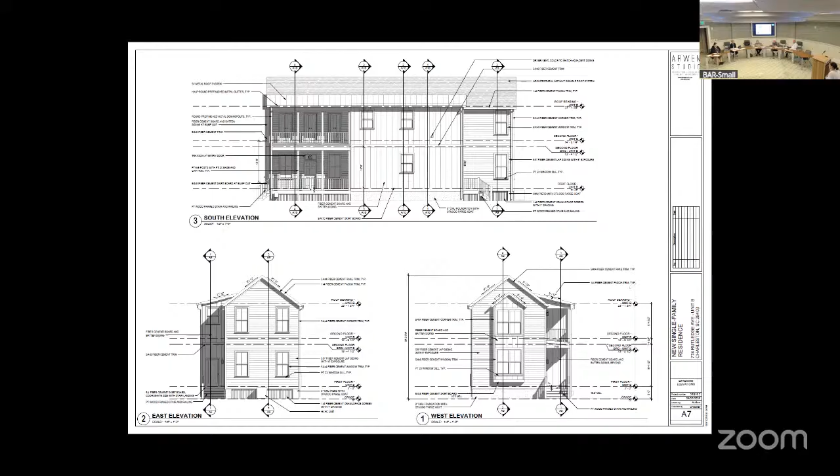Frankie, could you give us staff comments? Yes, ma'am. Staff had some observations first.

The previous structure, which was demolished, while taller than the front, was constructed prior to BAR purview. The proposed structure is not subordinate to the historic, but it is pushed to the rear. While pushed to the rear of lot, it could be pushed further back to the rear setback. As far as the context there, we have approved some structures that are slightly taller in the rear, but not substantially taller than the front structures.

I think there was an Andrew Gould project a few years ago where he also had a one-story building in the front and had slightly taller at the rear, pushed it completely to the rear of the lot. Historic structure appears to be dwarfed in height, scale, and mass because the existing structure is only one story. Staff would be supportive of its height, scale, and mass if pushed to the rear of the lot. And that is our condition for approval.

Staff recommendation is a conceptual approval with board and staff conditions and a preliminary and final review by staff.

Thank you, Frankie. Would the applicant like to respond to any of the comments? Thank everybody for the comments.

I'm Robbie Marty, representing the owners of this project. We were here a few weeks ago, and the board and staff had three primary comments about this project. This is the existing single family home.

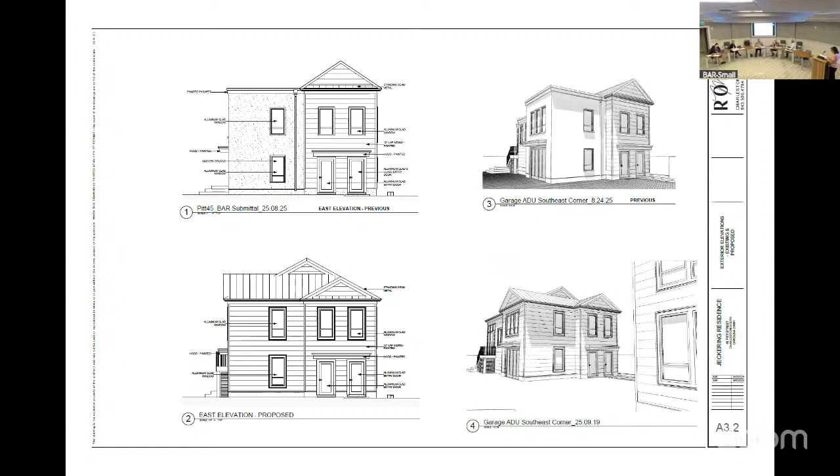The comments from the board and staff were for a restudy of the material palette, since the proposed roof was previously complicated, and we needed to unify the fenestration. The top drawings are the previous design and the bottom are the proposed. This is a view down the driveway of the southeast corner. We are now proposing to use lap siding that matches the addition done a couple years ago, and this is the side view of the south elevation.

We changed the roof design to an all gable roof. The third thing I did was restudy the windows—since we changed to a single material palette, it allowed me to use the same detail on all the windows, which helps unify them in scale and location.

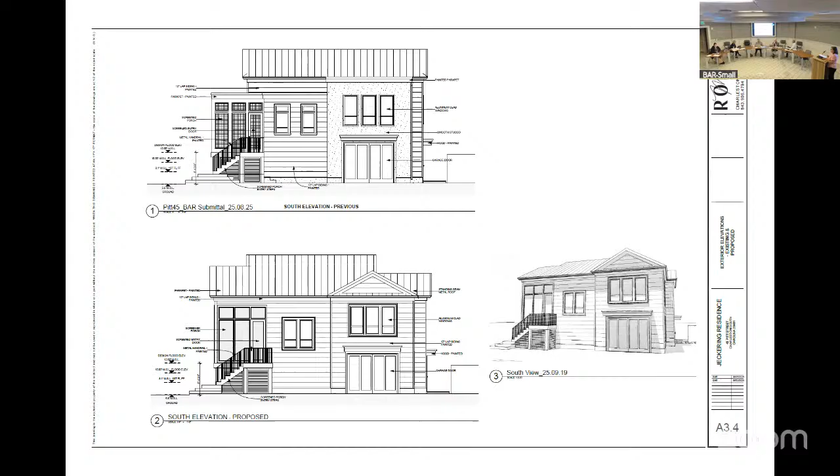One subsidiary benefit of the gable roof throughout is that I was able to lower the eave height from the previous design, where the flat roof needed to tuck under the edge of the gable eave, raising the whole structure. Getting rid of the flat roof allowed the eave heights to come down. Although the gable roof is slightly larger to encompass the whole building, the eave height is about a foot lower, and the total roof height is only 28 feet—just a foot higher than previously proposed. Looking at this elevation, the whole thing is still smaller than the existing building.

That's really all—I think I've got one more. Does anybody have questions? No questions. Is there any public comment?

Lynn Moore, Preservation Society of Charleston: While the PSC appreciates that the fenestration and materiality has been made more cohesive, we still feel the proposed roof form and massing is complicated and would benefit from further study. Thank you.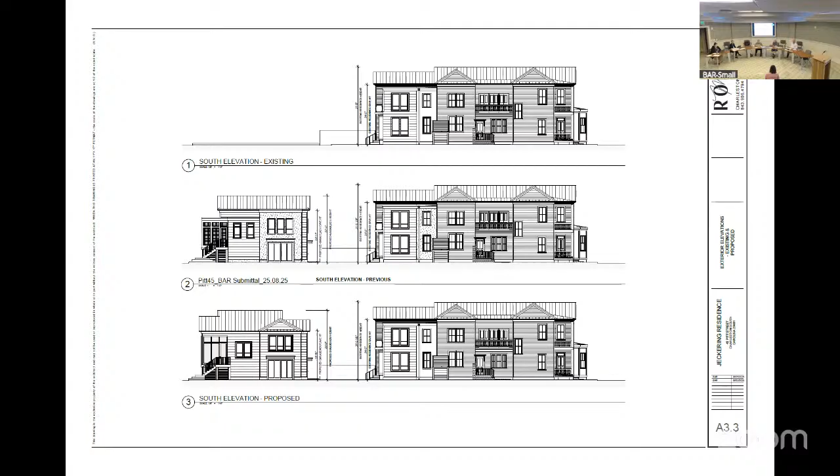Any other public comment? Frankie, would you give your recommendations? Staff observations: the material palette and massing have been restudied, and the fenestration has been simplified. Staff recommendation is conceptual approval with any board conditions, and preliminary and final review by staff.

Would the applicant like to respond to any comments? In order to accomplish the program, as discussed previously, the shape of the building calls for this—because of the garage, the apartment above, and the screened porch and workshop on the back. We feel it's a small building, and with the materials and simplified roof, it is now more simple. Thank you.

That concludes the public comment and application portion. We will move into board discussion.

I think it's substantially better. Yeah, I do too—simplified, and the lower eave height has really diminished the mass, even the apparent mass further. The roof does still have some complexity, but that's largely driven by the footprint shape.

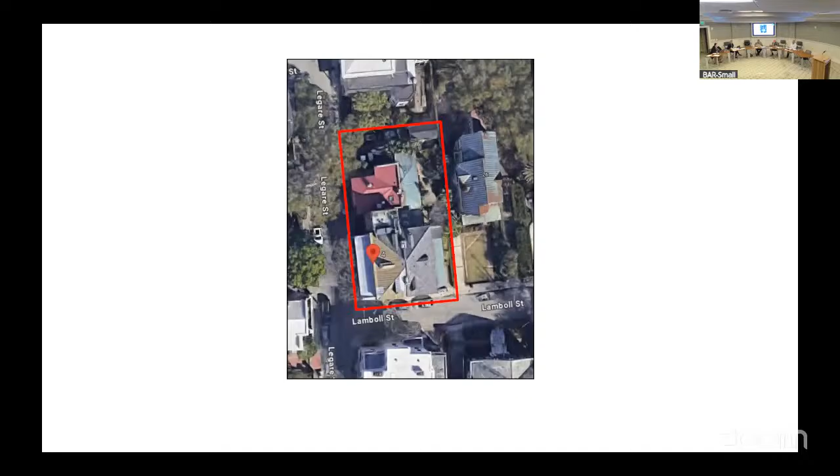Next item is agenda item B13, 4 Legare Street, in Charleston, Council District 8. It is a category 3, circa 1777 property in the Old Historic District, requesting conceptual approval for modifications to a third floor addition. This is the property's location on the route. I'll turn it over to the applicant.

Good evening, I'm Glenn Keyes. We are proposing a modest addition to a building that was built in 2002. The addition used to be to the north, added in 2002 to this 1770s main house.

Going through all Sanborn, but essentially what we're trying to do is this 3-story addition that's set back at the 3rd floor. We would like to fill that space out. This is a 33 square foot addition, but it allows the bathroom there to have a proper kind of space.

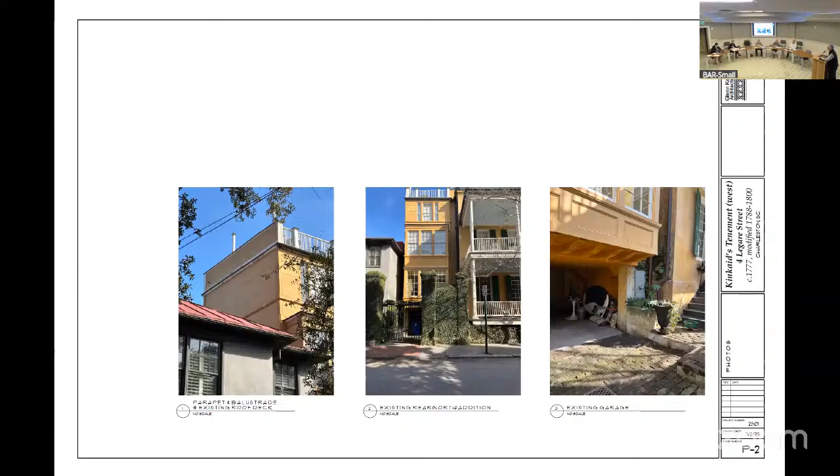And we'd like to create some doors. This is the addition right here, a 3x11 that matches up with what's below it, first and second, stacking more on top. These items would match.

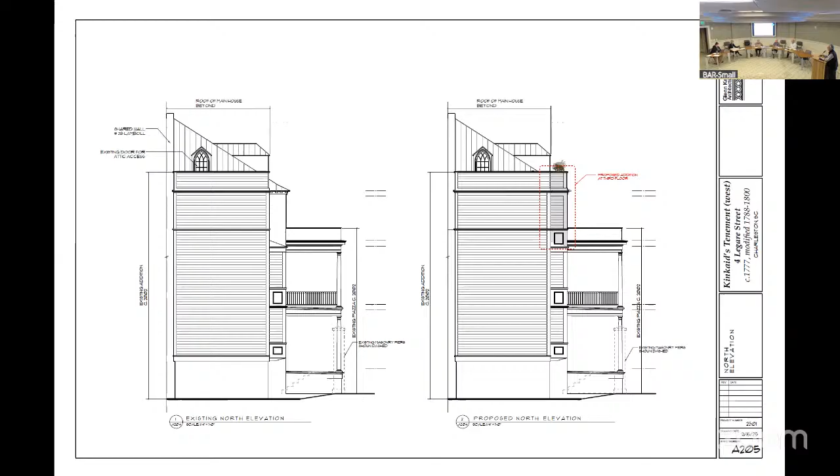And on the 3rd floor, there is a roof deck. We're just going to propose a planter there to fill that space. And the neighbors are all fine with this.

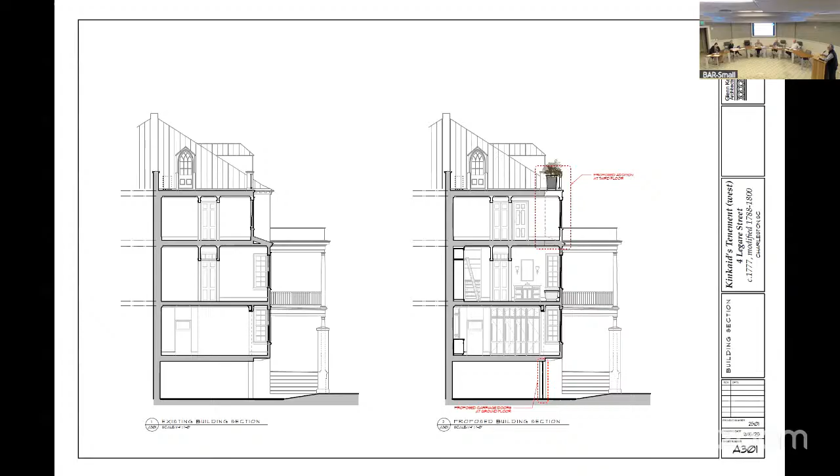We're proposing, this is just an open masonry opening now, to put some doors on that, fill that space. And that's really the extent of the project—these doors and then this addition.

Pressing for conceptual approval.

Does the board have any questions for the applicant? Is there any public comment?

Historic Charleston Foundation, HCF, holds an easement on the property at 4 Legare Street. The applicants have been in communication with us and their requests are in compliance with their easement requirements. We recommend approval of this request. Thank you.

Any other public comment? Frankie, would you like to share the recommendations?

Staff just had some observations. The proposed alteration is highly visible due to the corner location of the structure, but staff appreciate the very thorough application. Staff recommendation is conceptual approval with a preliminary and final review by staff permit. I just wanted to note I messed up on the agenda—it said it is not rated, but it is a category 3.

It's labeled in our inventory as 30 Lamboll, not 4 Legare. That was an error on my part, I apologize. That's all from staff.

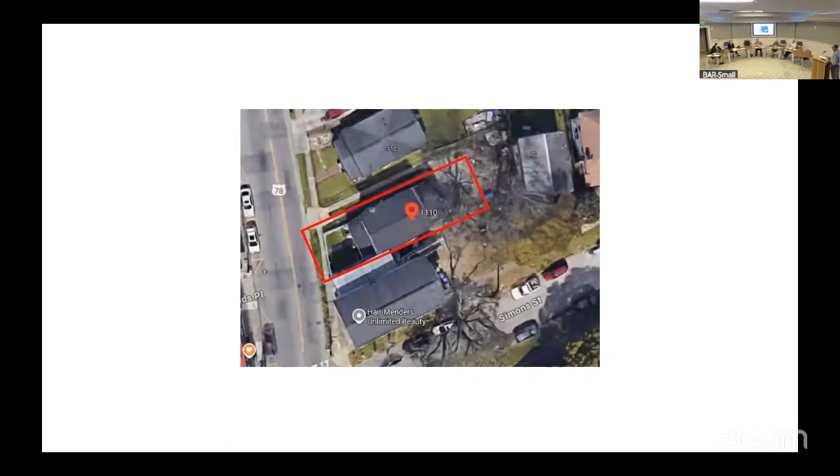The next item is 1110 King Street, item B14. It is in East Central, Council District 4, category 3, circa 1935, in the historic corridor district. They're requesting after-the-fact approval for a 2nd story addition. This is the property's location on King Street. I will turn it over to the applicant.

Good evening, my name is Rick Rockwell, my wife and I own Rockwell Construction. We're here to request approval for a second story addition located at 1110, property zone GB. We are proposing a second story addition and rear porch to the existing 1935 4-square style home. The addition will not exceed the existing lot coverage or footprint, 29%.

It will include approximately 212 square feet of heated space, 38 square feet of unheated space. The design is consistent with the home's original character, matching existing materials, windows, door types, trim, and overall aesthetic to maintain the integrity of the 1930s American 4-square style, known for its cube form, wide front porch, and two-story configuration.

We received neighborhood support—went to all the neighbors and talked to them about this, showed everybody, had a discussion with the Preservation Society about being on the tour of site visits, and invited them to come walk through the interior and exterior.

Earlier miscommunications have been resolved, and we halted construction once we discovered that we had zoning—we're working on zoning approval, but needed BAR.

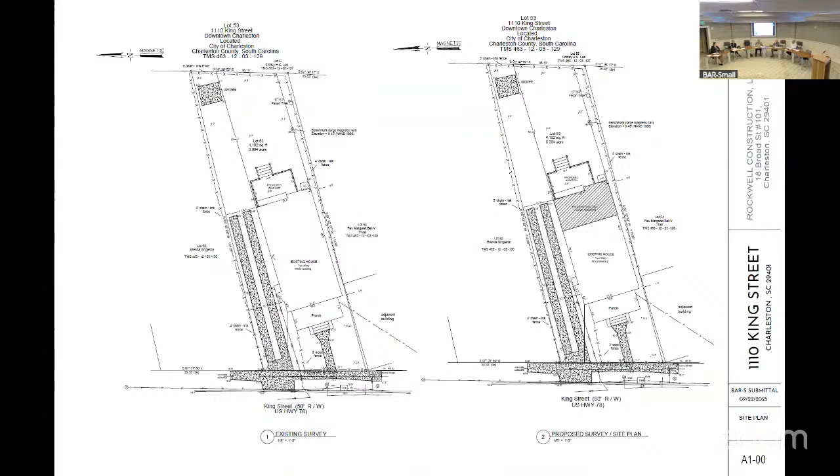And I will make some clarifications before going through the staff comments. It was advertised incorrectly by staff—we missed that it was after the fact. But site visits are not required for after the fact; they're only required for demo, and staff will typically add a site visit for something we think would be beneficial for the board to see visibility-wise. The reason the board was taken on a site visit for this after-the-fact application this morning is because it was demolition, and we were hoping there was some existing material still on site. So just as a clarification.

Staff has some observations. The addition was constructed without BAR approval. The proposed windows match the existing structure. It does retain corner boards. The oculus window is character-defining and the shape should be retained.

And you are correct, I checked it as a category 4, so I've added that into my comments. As we wrote these comments prior to realizing it was after the fact, I'll say what these conditions were: if it had been submitted prior to the work being done, these were going to be our conditions—retain the oculus window form, differentiate the windows from the existing structure, and tuck the roof of the addition under the existing eave.

So our recommendation would be denial of the after-the-fact addition, but with these conditions if you want to make an approval with any condition. We don't ever recommend approval after the fact.

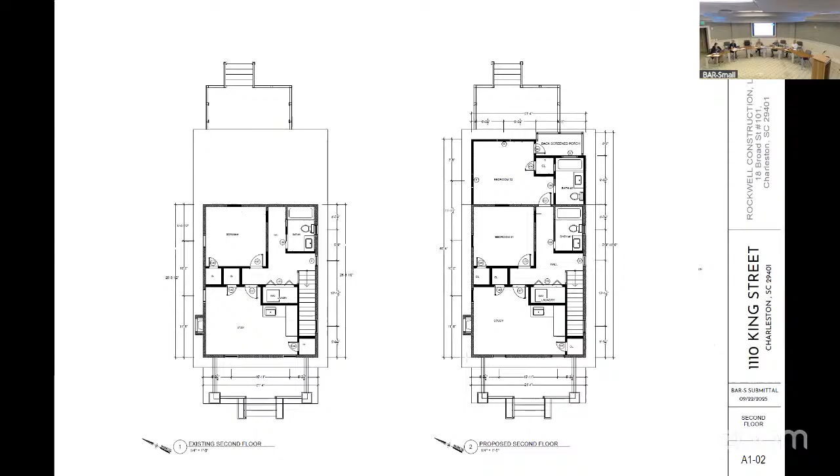All right, we will move to item B15, 72 Smith Street.

72 Smith Street is in Harleston Village, Council District 8, category 3, circa 1887, in the old historic district, requesting appeal of staff condition to change window pattern. This is the property's location on Smith Street. I will turn it over to the applicant.

Hi, I'm Jenny Liberatos of Liberatos Architects, presenting for Gail Wilkinson, the homeowner. We are here today because in the process of working through getting the building permit, we got a notice that it had been denied because we'd like to put 2 windows over 1 window in the rear of the addition. So we are here to ask for y'all to reconsider that condition that was put on the project.

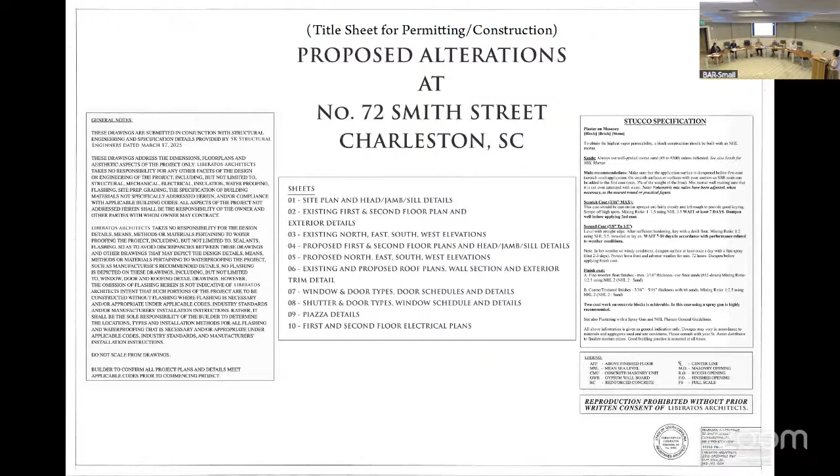This is our 4th meeting. We had letters of support from the neighbors initially when we brought this in front of y'all. We think it's a good design solution, it's used all over Charleston, it's used on the front of famous buildings. This is a vernacular single house, and part of the charm of Charleston's vernacular architecture is that things are not always 100% perfect, and you come up with creative ways of making accommodations for things.

Gail and I, the owner, met with city staff. They said that this condition was made by one particular member of the staff, but that they did not have the authority to reverse it, which is why we're here asking for y'all's consideration. They recommended we make this application, and said they would not oppose our appeal today.

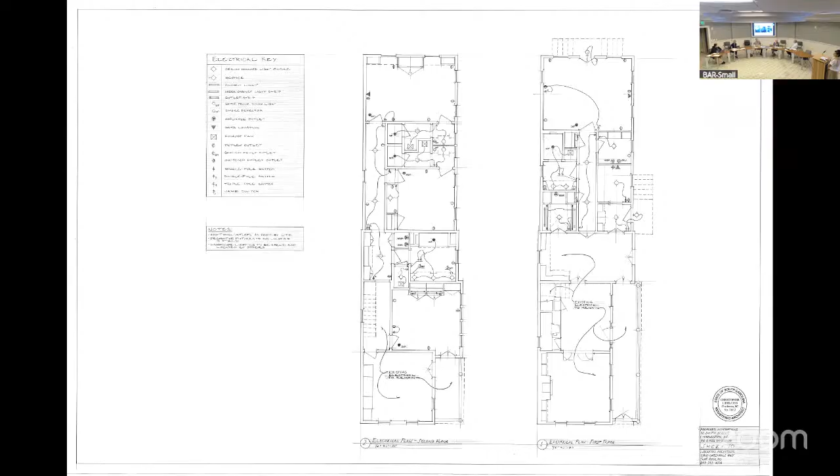Frankie, when this came to us before, did it have the windows up top? Yes, was there a board condition that they become a single window? It was an adopted staff condition. So that was a board condition that it becomes single, since we adopted this.

May I add, we were also the last applicant in that meeting.

What's the little room on the first floor directly below? What is that room, and would it be possible to do a pair of windows in it? It would look like a mistake if we put two on the first floor. It's a closet, and it would prevent us from having hanging clothes.

What if the pair on the second floor was simply two singles and just didn't allow? Two bathrooms, I was asking, honestly, couldn't the windows simply be separated, not ganged? There's a mullion between them. Is it just that the shutters would conflict? Seems like that would be another option, but we prefer to just have nothing. It's actually a little trickier detailing with the way it's done right now, but that's why I was asking.

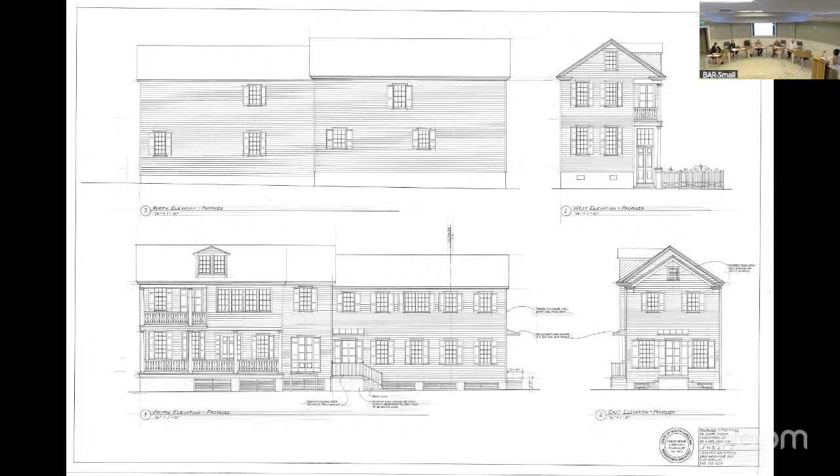Does the board have any more questions for the applicant? Is there any public comment? Staff comments?

I've got observations only. The project was approved by the board November 14th last year. The motion was a conceptual approval with staff conditions and a final review by staff. The staff condition was that the center windows should match, either with paired windows or single window on both floors. The permit was denied by staff for not meeting that condition. Since the comment was adopted by the board, staff cannot override. Staff does not have a recommendation because this is an appeal of a staff decision, so we cannot give a recommendation.

It'll be visible, but it's a fair distance back. In a perfect world, that's got a very strong rhythm to that facade with the windows, but on the flip side, it's visible, but I don't think it's so far back that it's that visible or noticeable. In the past, we've been pretty strict. We've denied others recently that arranged windows for floor plans.